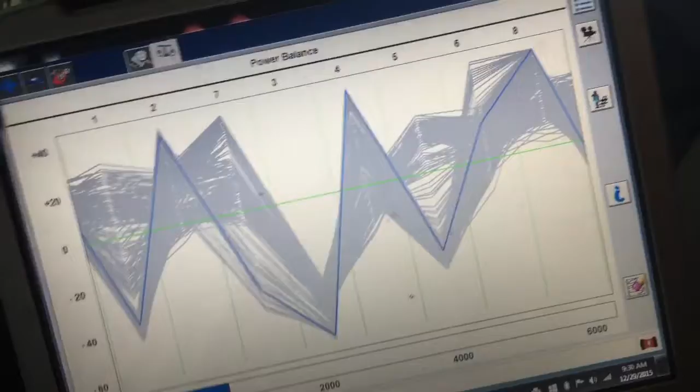Yeah, I call this absolute injector hell. I'm going to shut it off and run a relative compression test, because number 3 is really worrying me. Look at it, it's about to die. Come on baby, don't die.

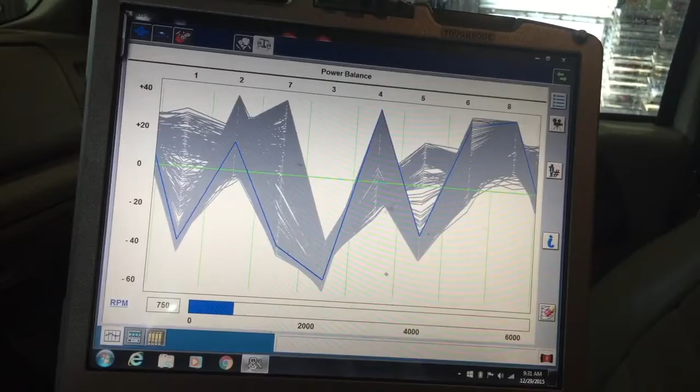Let me run a compression test, let it run a little bit, maybe it'll clear it up. It's just straight up the outside, passenger side, the whole freaking side.

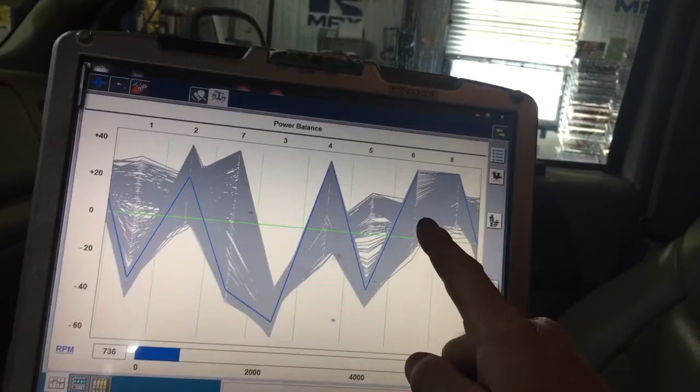Maybe we go in and just do those 4, and hope like hell number 6 stays alive. You see how 2, 4, and 8 are looking great. The rest of them are shot.

Damn, it's outside right here. Ah, that's just cold smoke, you can see it dissipating in the air. So it's not smoking terribly bad, but it is like 12 degrees out here, so it's really freaking cold.

But it is dissipating, so if it was smoke, it wouldn't dissipate away that quickly. It's just coming out and dissipating, you can kind of see it right there. Yeah, I'd like to show the smoke.

With that being the entire odd side, I need to check and make sure it's getting fuel. Hopefully nothing's, I mean, it's as rare as it could be, hopefully there's not anything in the fuel line starving those 3 for fuel, just on that side, because it's pretty odd that you see this right here with all 4 of them on the passenger side turned to crap.

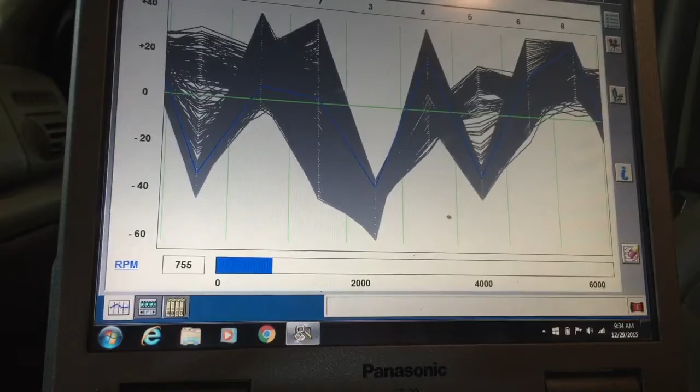But yeah, number 7 just came back a little bit. Oh no, there it goes again. Let me get it up here where you can see it.

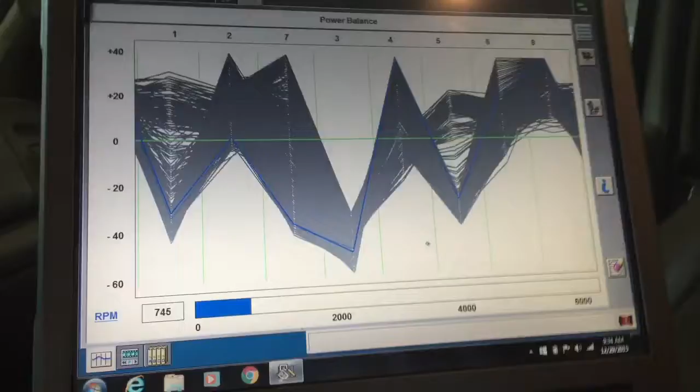Yeah, it's just the odd side. Number 3 is by far gone. Let's see what kind of... I think we got a... oh, I got the battery charger still on. Let me shut the battery charger off.

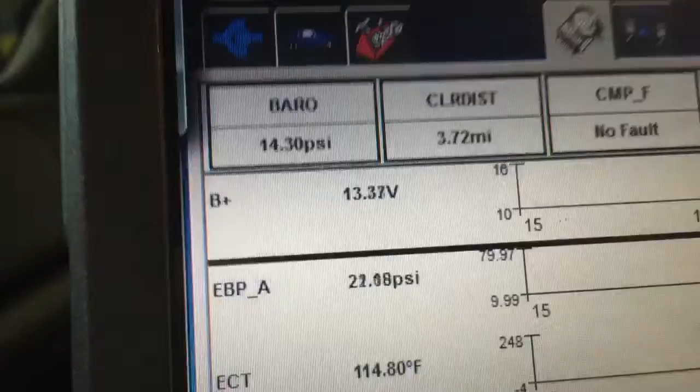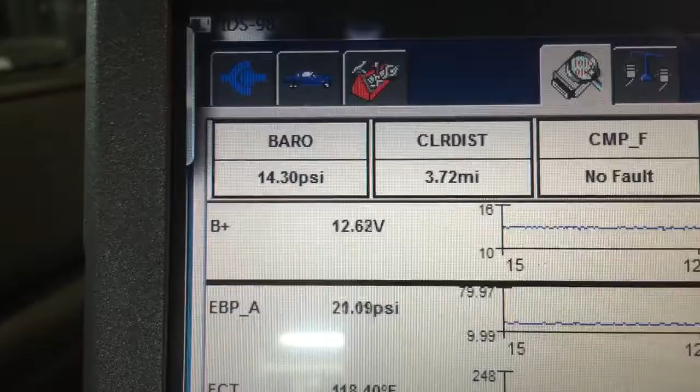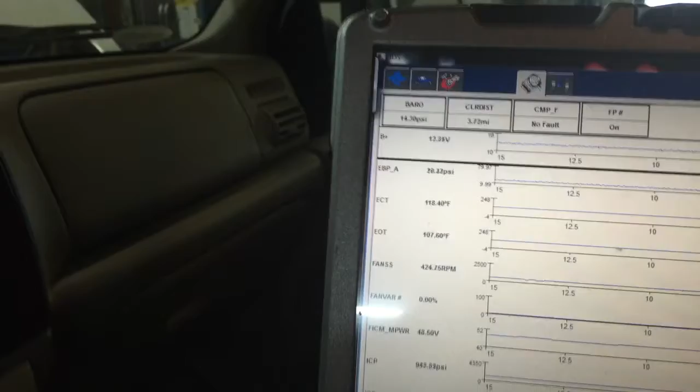Okay, that last screen was with the battery charger on. Now this is with the battery charger off, just the alternator. Definitely a little low, but the batteries are pretty much shot. It needs to be driven. Maybe it'll charge the batteries back up. I'll load test them when we go in it, but I'm starting to see 12.8, so it might just need to be driven to bring them back up. I hope, because that alternator isn't pushing out enough volts from what I'm seeing.

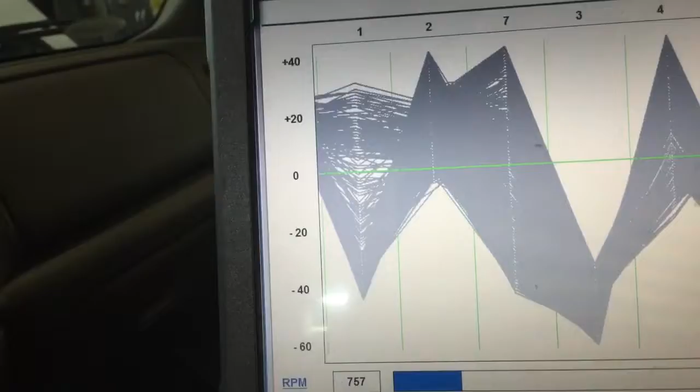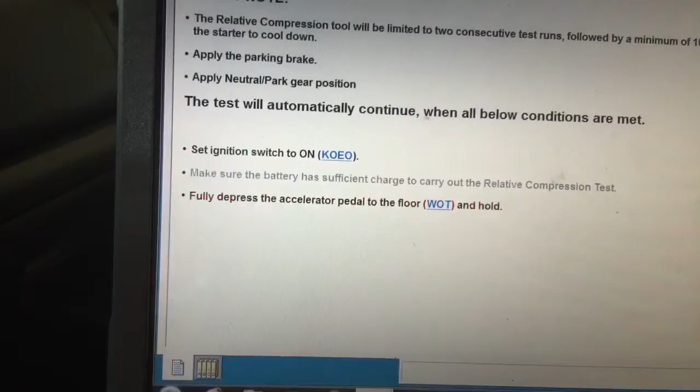Let's kick this down, and I'm going to go ahead and run a relative compression test, a computerized compression test. Okay, here we go. Oh, the battery's too dead. Hang on, let me get the charger back on it. Okay, let's try it now.

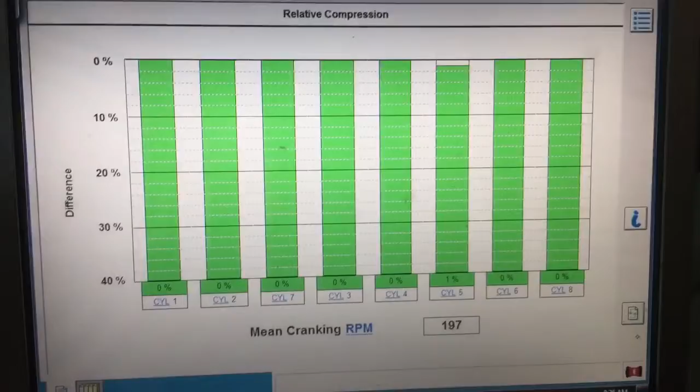Yeah, it sounds okay. Number 5 showed a little low. Normally it would fire up right there, but if you let it off soon enough, it's cranking at 197 RPMs, that's pretty good.

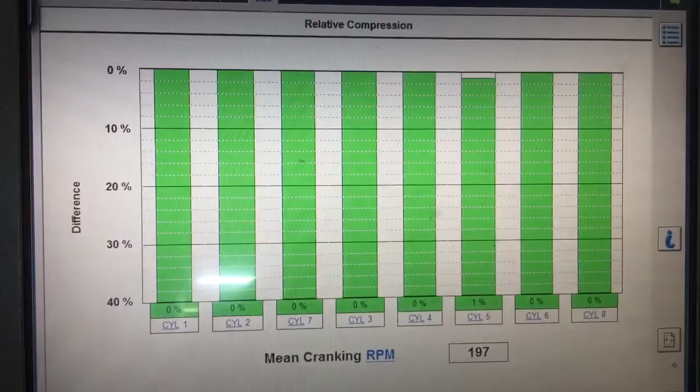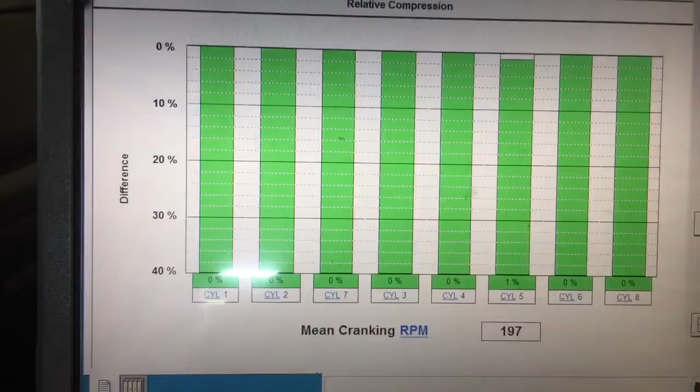So that checks out. We at least need to put injectors in it and then check the fuel line. I really want to do that. It's a pretty rare occurrence, but we're gonna check fuel pressure too. I didn't want to let it run too long because it needs fuel. I don't want to sit here and run it out of fuel doing diag. So I might give it a couple more minutes running, and then if it clears up at all to where we can drive it, I'll drive it up to the fuel stop and put some fuel in it. Otherwise, we gotta do fuel cans.

All right, if I see anything, I'll be right back.

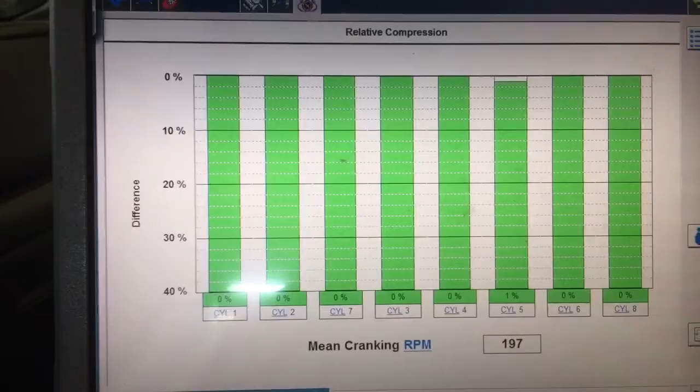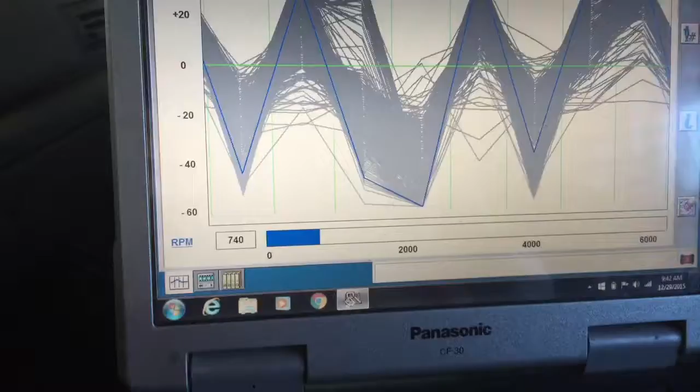All right, I went to pull it out to put some fuel in this thing, but it ain't happening. It's running too bad. So I'm just gonna have to get it back in the shop, get it inside. We got to get these injectors out. All right, here you go.

I'm about to take it down, but if you see, 2, 4, 6, and 8 appear to be okay. I've been here before where we only do one side because these are so bad that we can't accurately diagnose these. Once we get the odds back up to where they need to be, who knows what 2, 4, 6, and 8 are gonna do. I've been here before and we've gone in twice before and wound up doing both sides. But from what I'm seeing, it's gonna run a hell of a lot better just doing the odd side.

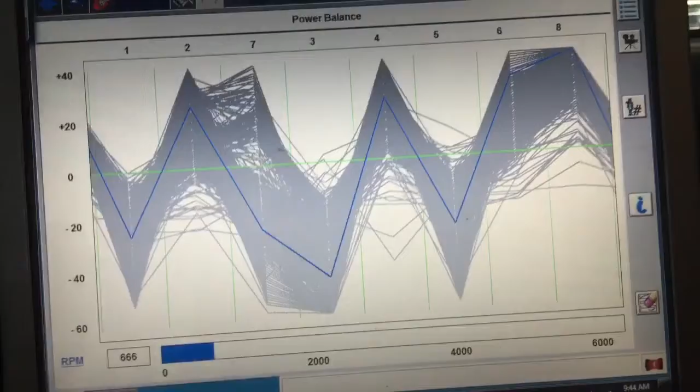But I thought I would show this one more time before we kick this sucker off and go for it. I'm actually holding the RPMs up. If I hold it down, yeah, it's just the whole bank is shot.

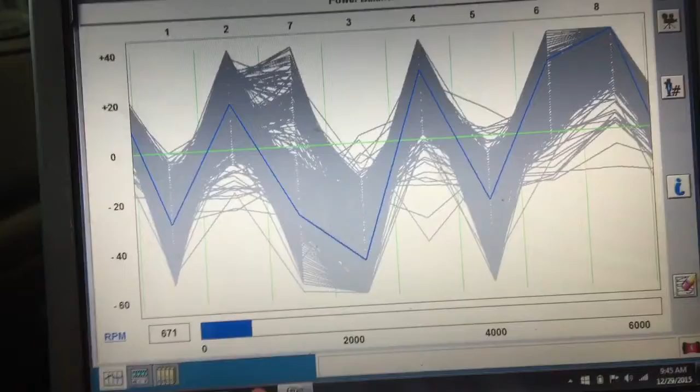I did notice, let's hope we don't have any kind of coolant issue, because the coolant in the bottle's real low. The relative compression came back okay, but there is a chance we got a failed EGR cooler. I saw a little bit of coolant dripping out of the exhaust, but I'll pull the valve and see how wet it is. I'll make another video of that if I see anything concerning. But I know we got injectors bad.

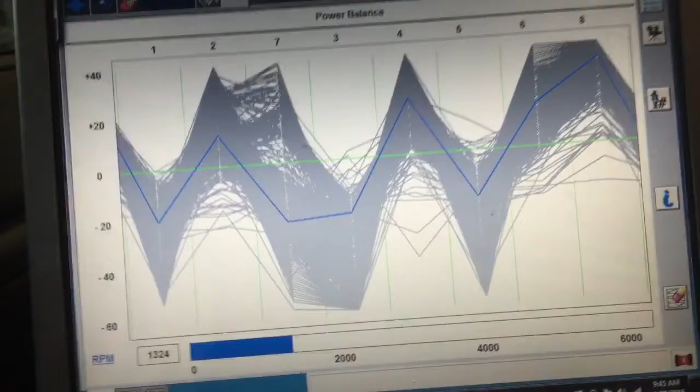It just happens to be on that side over there. If this coolant has run down into there, it shouldn't really affect... yeah, it just sucks, all 4 of them, for sure. All right, have a good day, guys.